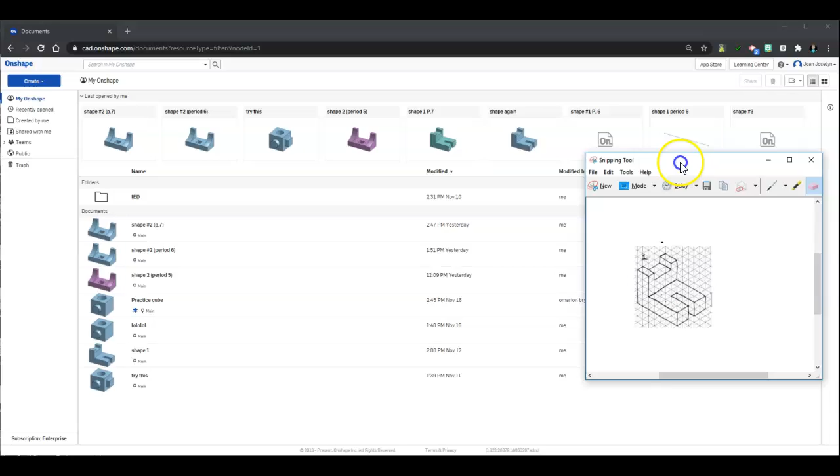So we're looking at this guy, and we know that each box is equivalent to 1/2 inch. My approach will be to create this L shape, extrude it backwards, and then cut out the other 2 parts. If you follow along, pause as you need, so you can keep up.

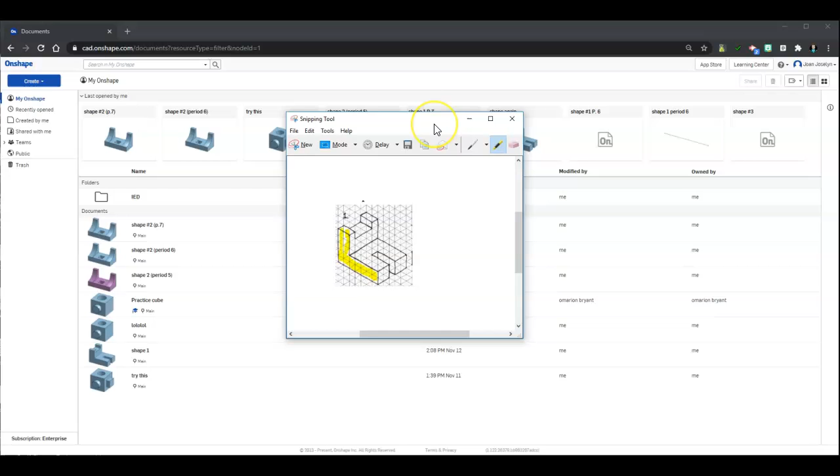So I'm going to count these and get started. First, make sure you're in your IED folder, then your practice folder, and hit create in the top left corner. Click document, type in shape number 1. I'm going to add the word video because I've made this a couple of times. You don't have to add that. Click OK.

Give it a minute to get caught up. If it gives you an error message, just refresh the page, you'll be fine. Okay, first things first, let's check our units. 3 bars, top left, workspace units, make sure we're in inches. Good to go. Close that up.

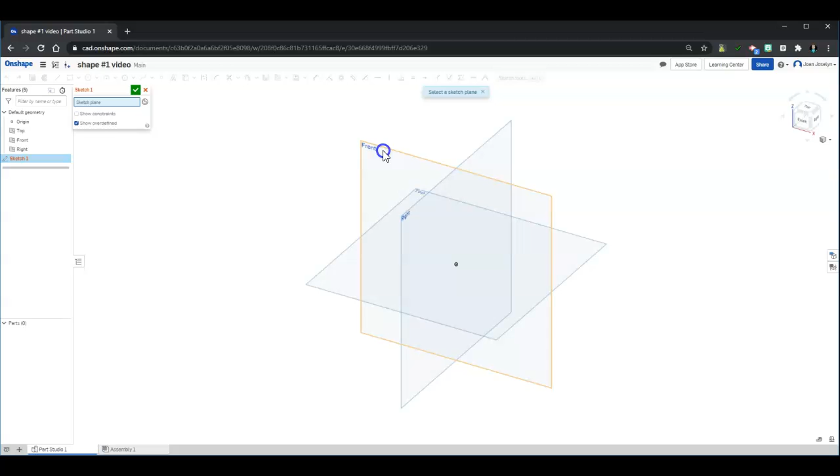We are going to start a sketch. Sketch, top left corner, on the front plane. I clicked it to make that sketch appear. Then I'm going to come over to the left side, this is called the browser. I'm going to click the eyeball next to top, front, and right, so I can have a cleaner interface here.

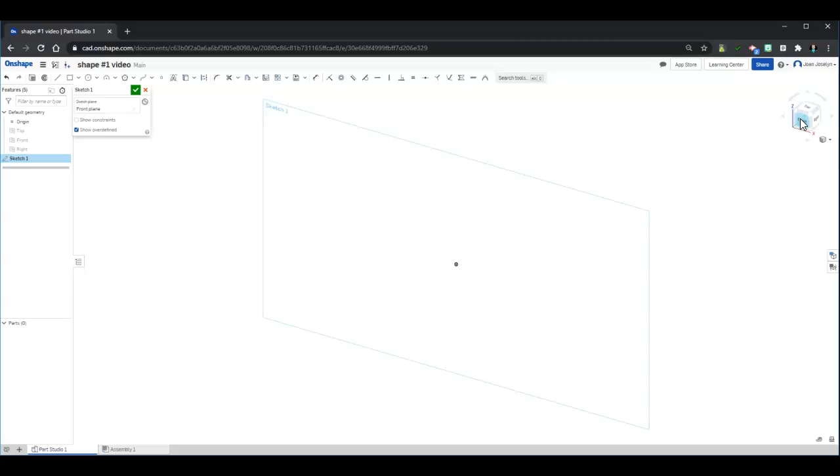Make sure sketch 1 remains open. Come over to the right side of your screen, find the view cube, click front. That puts it right in front of you. I'm going to scroll out so we see better.

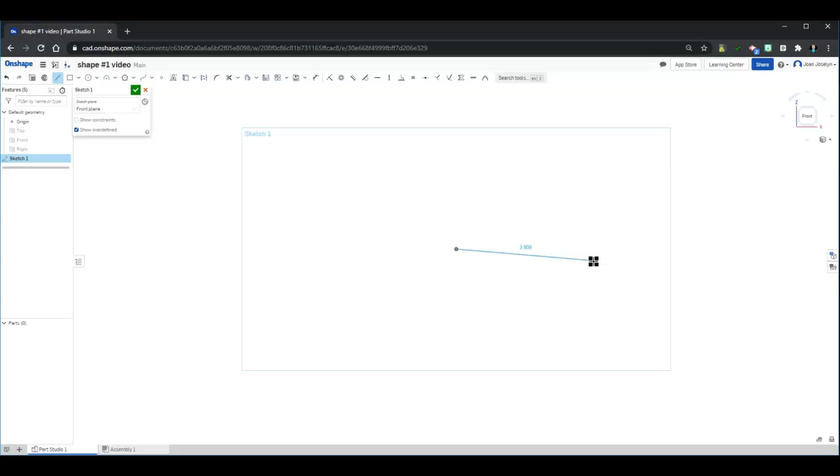I'm going to use the line tool, it's in the top left. I'm going to click the origin and drag to the right. I want to make sure that I am horizontal, and you see that little black dash that comes up to the right? That means I am. So if I move away, it goes away.

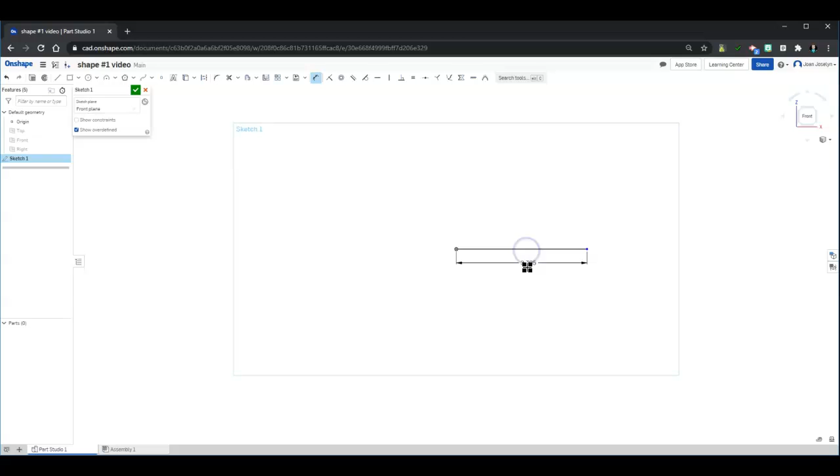Okay, so we don't have to worry about the dimensions right now, we're just going to left click. I'm going to hit escape on our keyboard to get out of the line tool. Come up to dimension, if it disappeared, you may have closed this, reopen it. You reopen it by clicking here, not creating a new sketch. Dimension, click your line, drag off, and call it 3.5. It was 7 boxes, and they're 1/2 inch each, so 3.5.

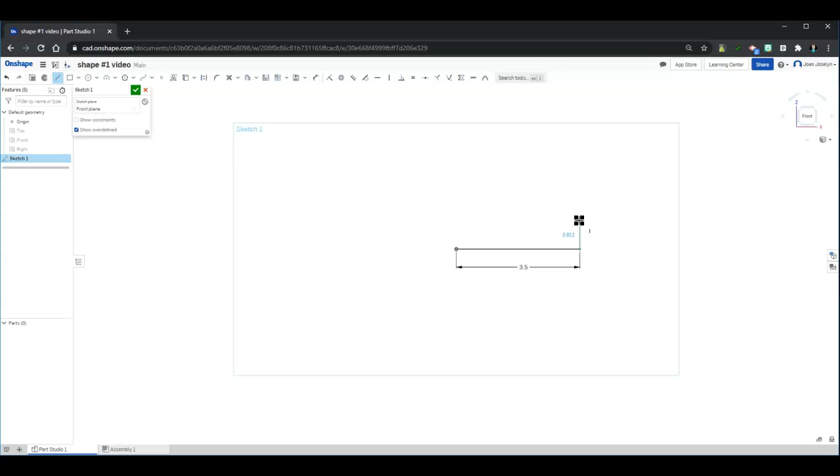Let's come back up to the line tool in the top left and complete the rest of the L shape. We won't do the dimensions until we're done. So line tool, left click where the circle meets, drag it up. Make sure that vertical dash shows to the right there. Drag it over to the left. I'm left clicking to make it close. Make sure you're always seeing that little dash follow you around. Left click, left click. When I get to this side, you want to make sure you see that dash line.

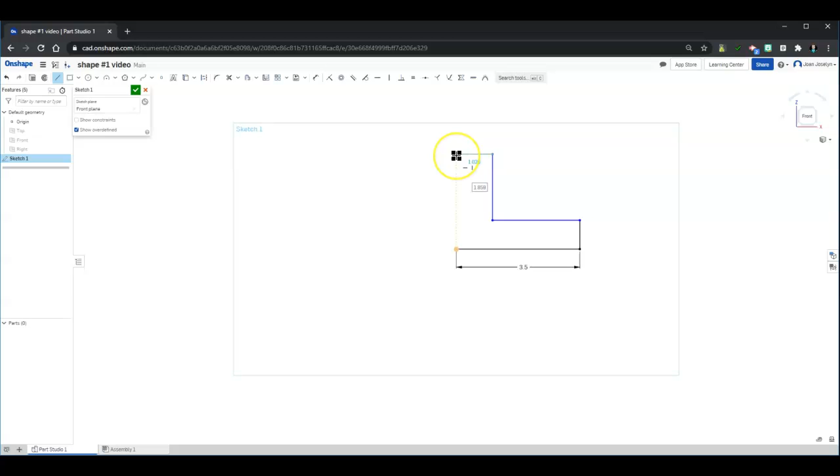A couple things going on here. I have a vertical dash, a horizontal dash, and then that whole dashed line. So you want all of that to pop up. If you don't see it, you are off, right? See, all that's gone, all that's gone. All 3 of them should show up, 2 black dashes and the dotted. So left click, that means you're lined up perfectly, and then left click at the bottom.

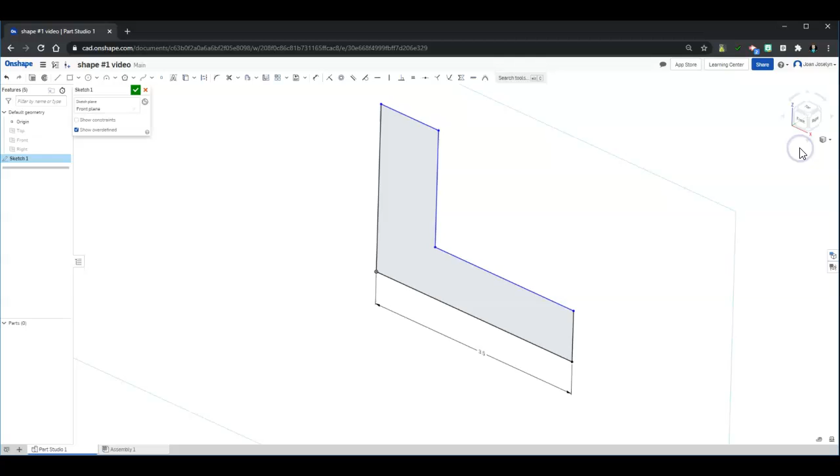So I have a nice closed shape. I'm going to hit escape on my keyboard. I'm going to come over to the right side and click isometric using this drop down menu. Scroll out. And now I'm going to find extrude, top left corner under the word OnShape. Left click extrude, your object should automatically pop up. If it doesn't, you can click it.

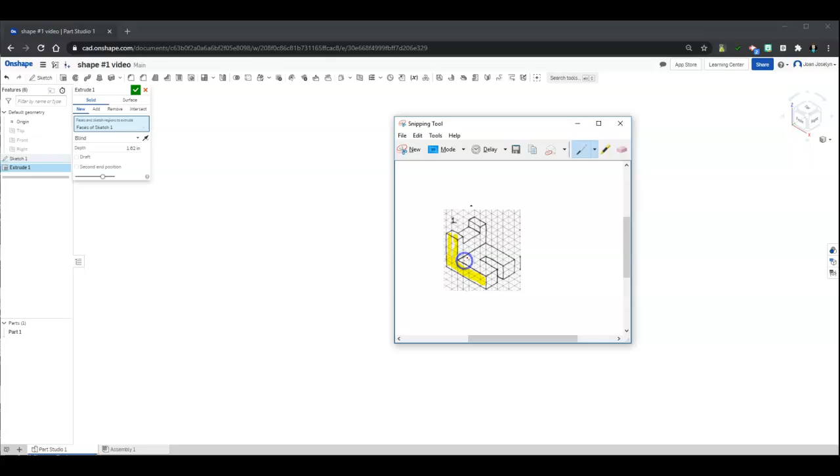Click on the arrow and drag it backwards so that we're going in the same direction as our picture. It doesn't really matter, but we may as well do it the way we planned it. So we went that way. I dragged it a little bit, not worried about the dimensions. And now we're going to change this depth here to, let's see, I need a pen. 1, 2, 3, 4, 5 times 0.5.

So 2.5, enter, 2.5, enter on the depth. And then you have to hit the check mark to make it stay. Okay, good, good work so far.

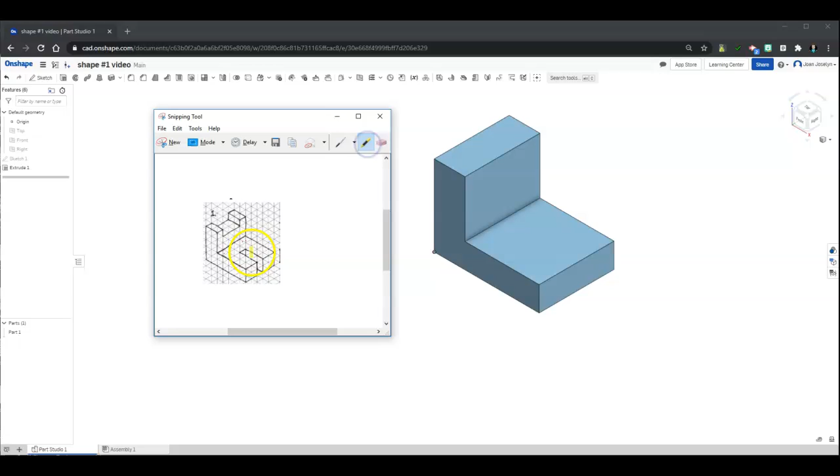So now we're going to cut out this center piece right here and line it up. That'll be the next thing we do.

Okay, you need a new sketch. Top left, new sketch, click on the top here, left click. And then I'm going to hit top on my view cube on the right side of my screen, so it rotates, it's right in front of me. Scroll out so I can see it better. So we have rotated, and we have to remember that when we set this up.

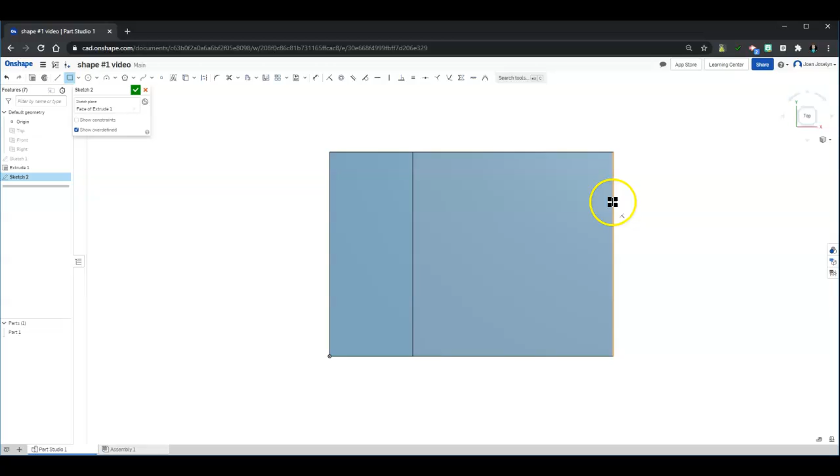So I'm going to use the rectangle tool for this one, it's just easier. Left click on the rectangle tool. Come over here and make sure that this line changes color. Okay, we're going to be a little bit high right around here, it doesn't matter where. I'm going to left click and drag diagonally. So I'm a little off, but whatever, we're going to fix it. I'm going to left click to close it.

So I got a rectangle, made sure that I was right on that line. Hit escape on your keyboard. Next thing is a dimension tool. If you don't see it, make sure sketch 2 is open. If sketch 2 got closed, make sure you double click it to reopen it. Don't make a sketch 3.

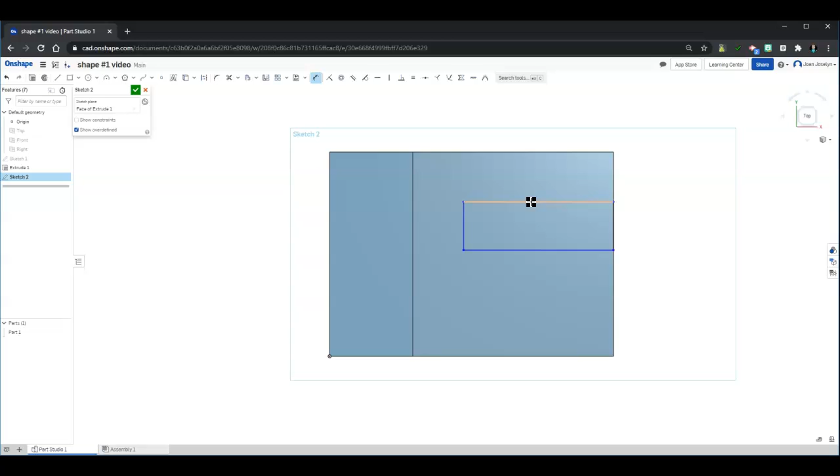So dimension, we'll start here. Left click, and then left click again after dragging it away, and it should be, it's so small. 1, 2, 3. It is 3 boxes, so that is 3 times 0.5. Let me see if I can put that in here.

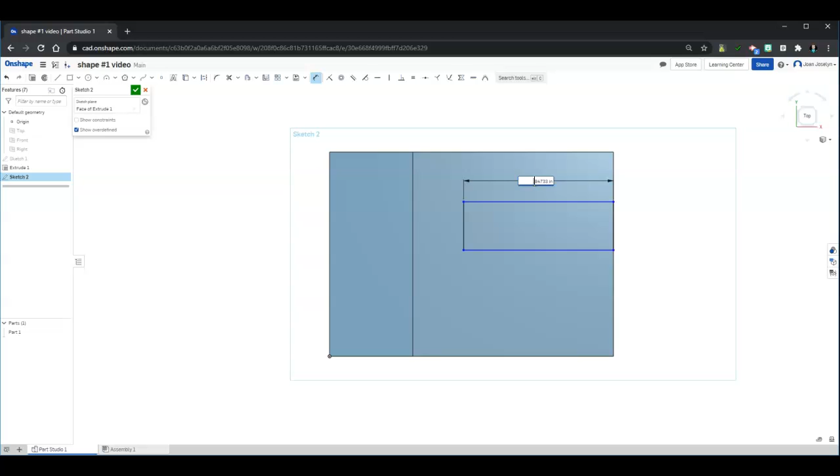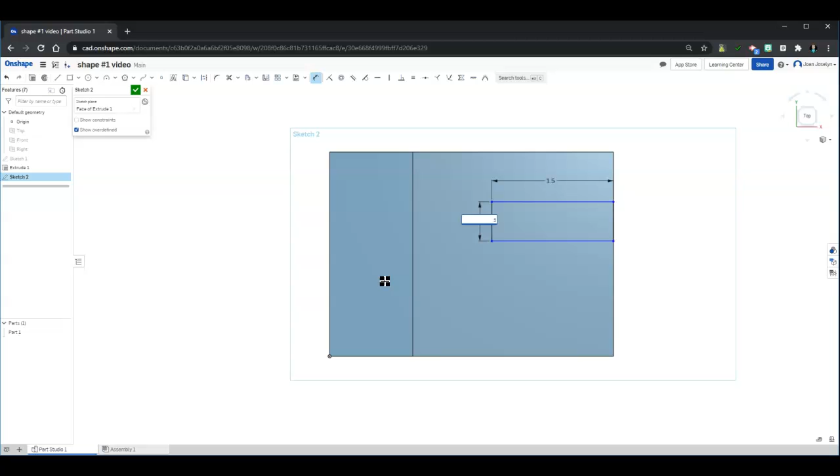3 times 0.5 should be 1.5. So you can type in 3 times 0.5 or 1.5. That makes this one good, they'll line up, so you're good. You just have to do the one on the left here, and it was only 1 box, so 1 times 0.5 is 0.5. It's in the wrong place, but it is the right size, so I'm good to go.

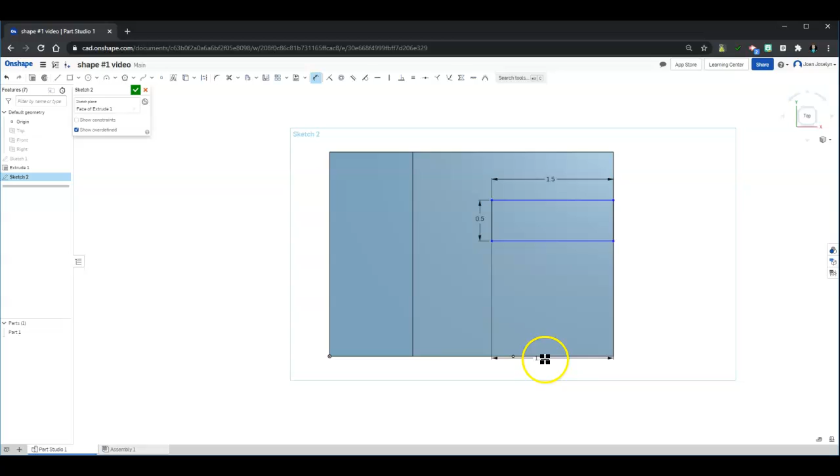Still in the Dimension Tool. If you lost it, make sure it's highlighted. I'm going to do 2 things here: click the bottom of my new rectangle and the bottom of my object. See the color change? Always stay away from that dot. Click, and it'll change your dimension to look like this. If it didn't change, go back and do it again. Just hit escape and pull it off your object.

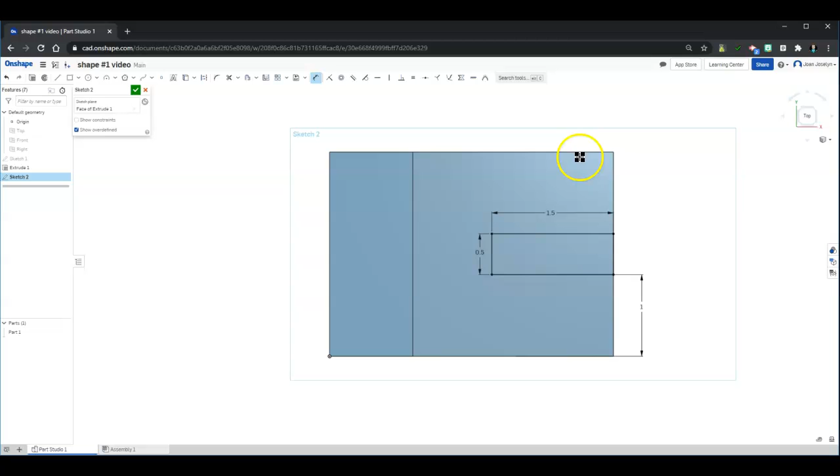Left click, and this needs to be 2 boxes wide or 1 inch. So if you did 1 inch here, it should definitely be 1 inch here, and you don't have to do anything because you've already dimensioned this. There's nothing else to do. Hit escape.

Come over to the right side and put it back in isometric view. You can start to see it form now.

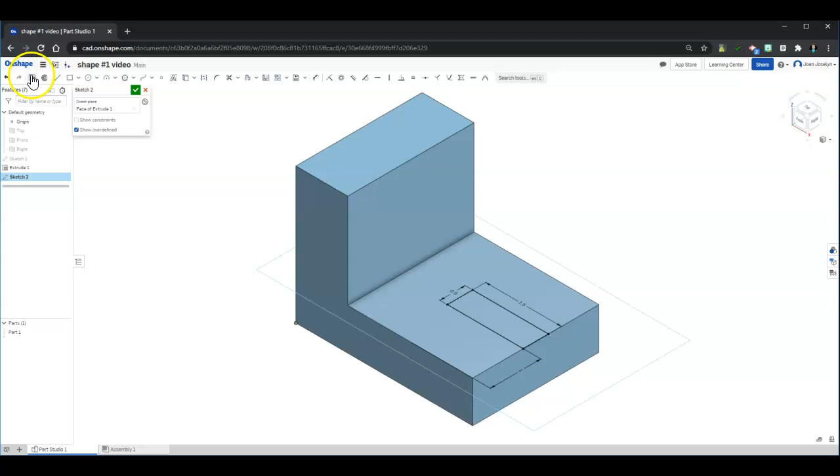Let's do extrude, top left corner. Your sketch 2 is still open. Top left corner, extrude, it should find it automatically. If it doesn't, you just click in the rectangle. And we don't want to add material, we want to remove.

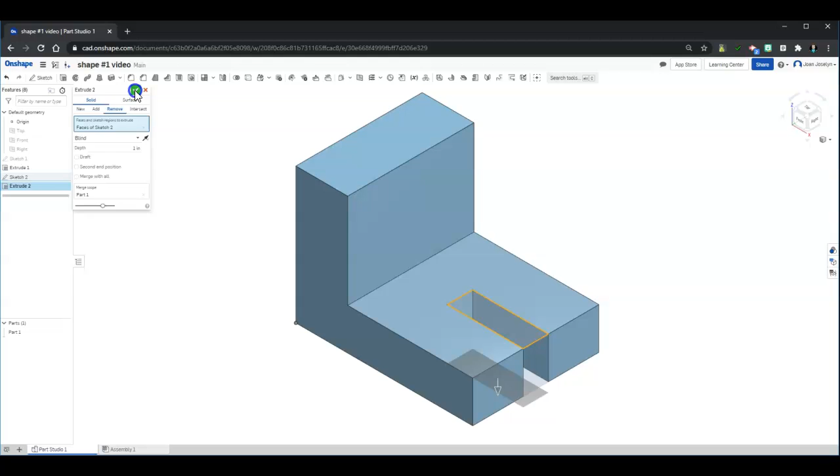So first let's drag it the other way and click the word remove up in your box for the extrusion. As long as it is more than 1 inch, you're okay, so I'm going to type in 1 just to make it perfect. Enter, and then click the green check mark. You can right click and move to see that it has removed the material. If you have a little line here or some material here, then you missed putting in the first rectangle, and you should undo and redo that part.

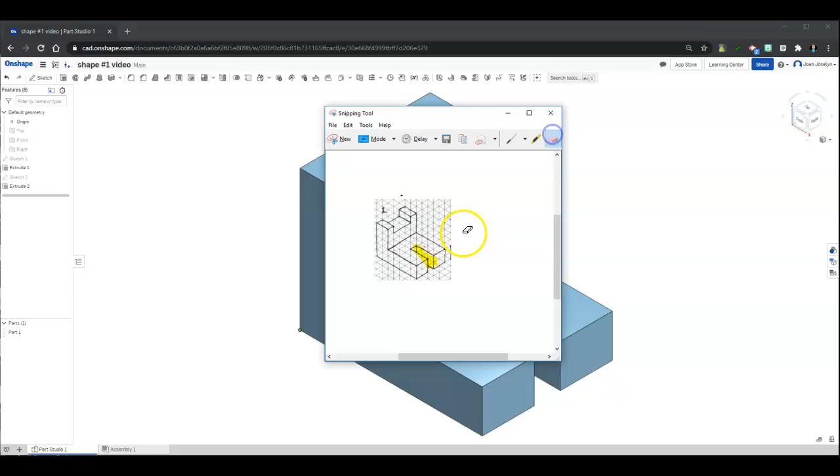Okay, back to isometric view. Let's do the top part of this object. So we're going to look at this right here. Should be nice and easy.

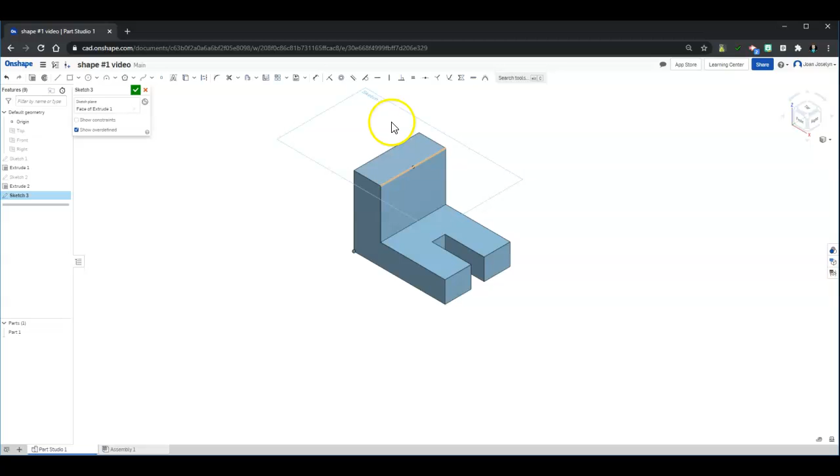So new sketch, click on the top view, and then, did I get it? Yeah, Sketch 3, it says select. If it still says select a sketch plane, then it didn't get it, so make sure you see that word pop up. Click on the top of this view cube over here to put it in front of you again. Scroll out.

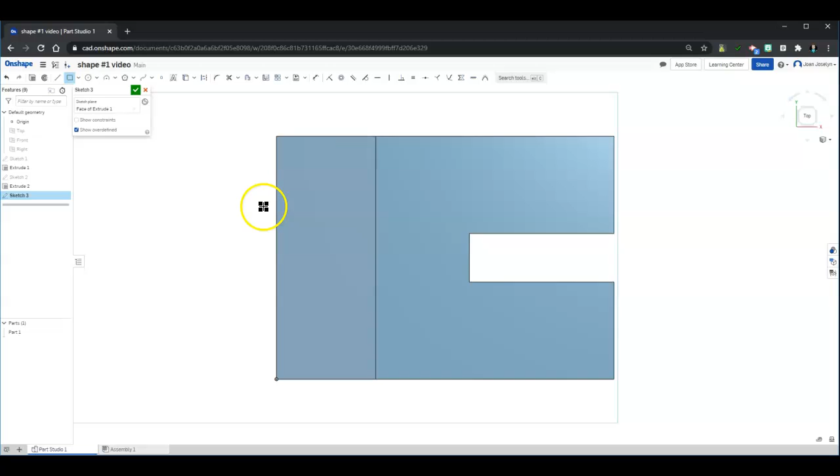We're going to use the rectangle tool again, and this time we left click, rectangle tool. I'm going to make sure I click, see the color change. Always see that. Left click, drag diagonally, left click. I'm not worried about the dimensions, we're going to fix them now. As long as I saw the color change on both of these lines, this one and this one, then I know I'm lined up out here and I only have to fix the dimension in here.

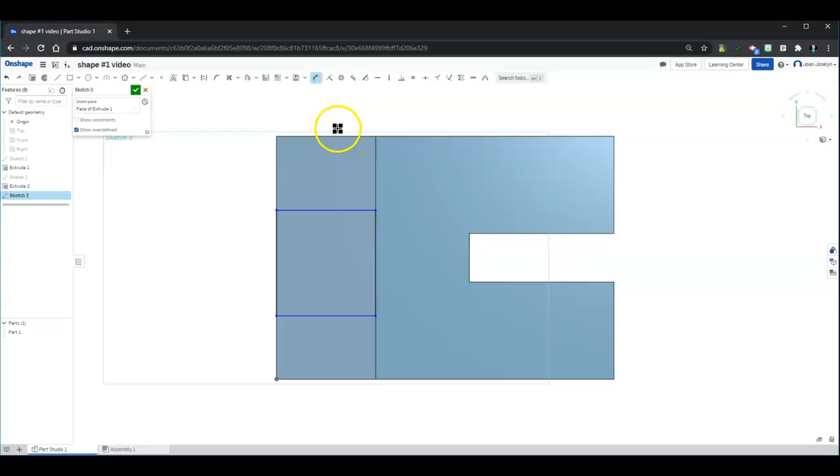So escape on my keyboard, dimension tool in the center, and then I want to do how far away. I want to be 0.5 inches away from the edge, so I'm going to click the edge, not on that dot. Click the edge, click the edge of the new rectangle you just made. So I'm left clicking and it should give you the dimension. You can drag that, left click it, and type in 0.5.

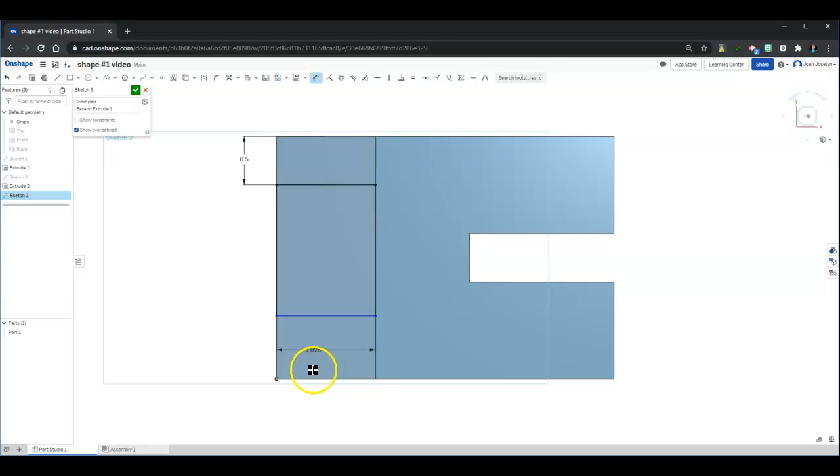So we're good on this side. We have to fix this side. Same thing, left click. If you see it like that, that's the wrong direction. We want to left click and drag it out here and call it 0.5.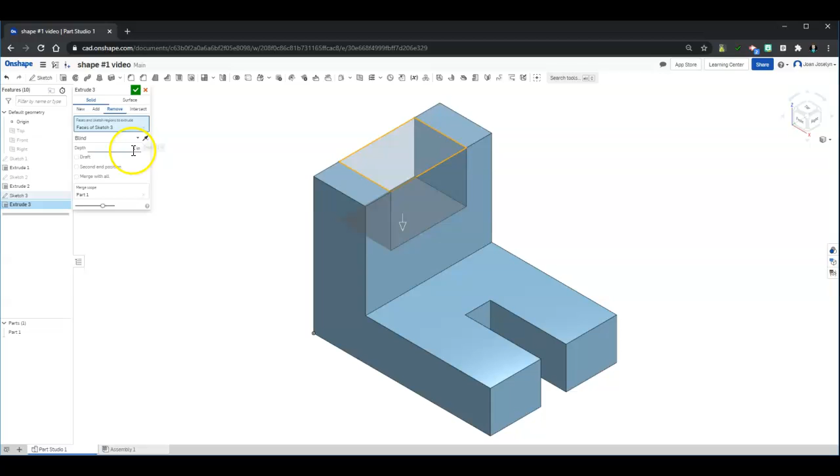Okay, now I'm going to come over to the right side, hit isometric so I can view it better. And I'm going to use my extrusion tool while my sketch is still open, extrude. I want to remove material, so I'm going to click remove inside the extrusion. And it's 1 box deep, so I want it to be 0.5 in the depth, type in 0.5. It knows it's inches, so you don't have to type inches, it does it for you. Hit enter, and then click the green box.

And well, there you have it. Enjoy your work. Compare it to your picture. Pretty cool, huh?

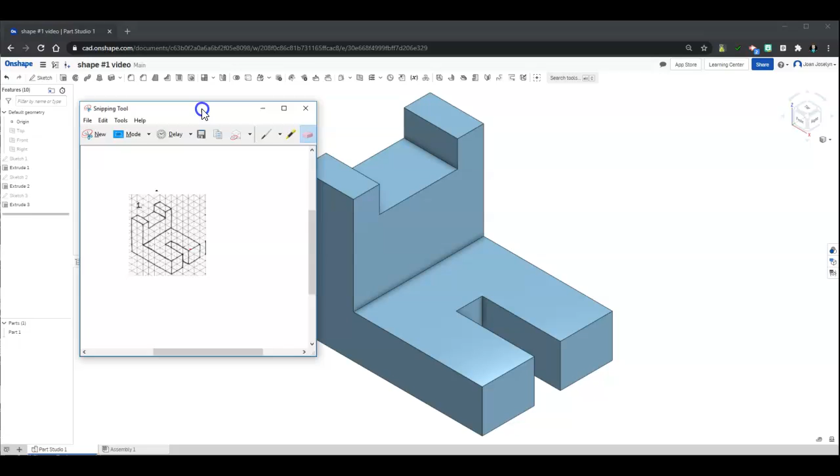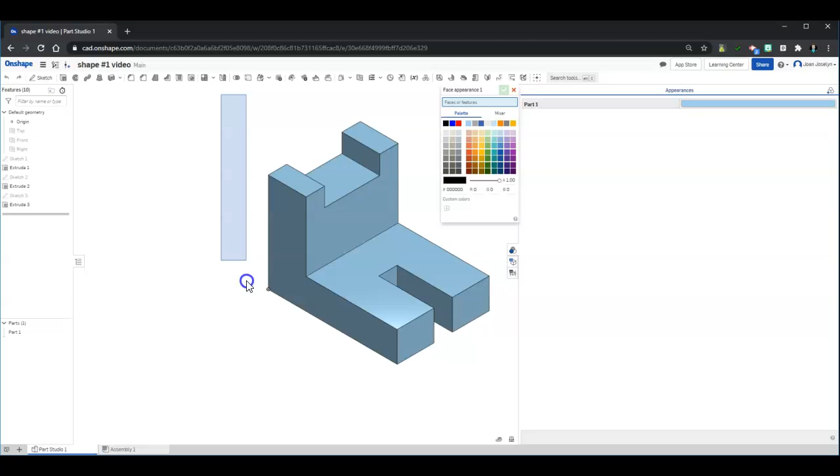Thank you. Appearance. So I clicked on these dots, they were kind of hidden in the corner. I clicked on those, and then if I go up here and click it again, add face appearance, it gives me this little color palette. I'm still new to this, so I'm trying to figure it out. What I've done is left click and drag across my object, and that just makes the whole object whatever color I choose. You could also do it individually, just play around with this.

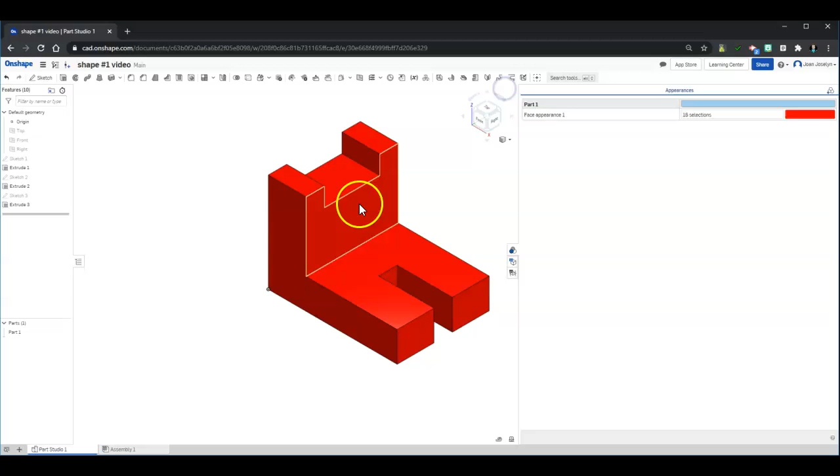So I'm going to pick a nice contrast to what we've been doing. We'll do red this time, and then click the green check mark. So see, it says 18 selections. You could do it individually and make the whole thing all color crazy, however you want.